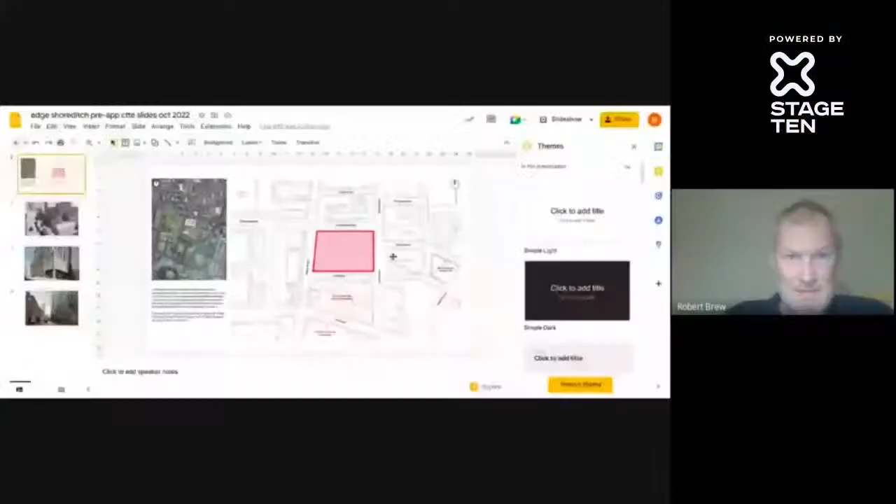Can I just check that I can present images in the normal way? Yeah. I'll try it anyway. Can everybody see that? I can't hear anybody. You can see it, Rob. Excellent, thank you. I'll continue then.

The site is in Shoreditch. It's a block bounded by Christopher Street, Wilson Street, Crown Place, and Earl Street, quite close to Finsbury Square, not very far at all away from Liverpool Street Station. The most significant heritage asset in the immediate vicinity is a terrace of Grade 2 listed Georgian houses on the north side of Christopher Street.

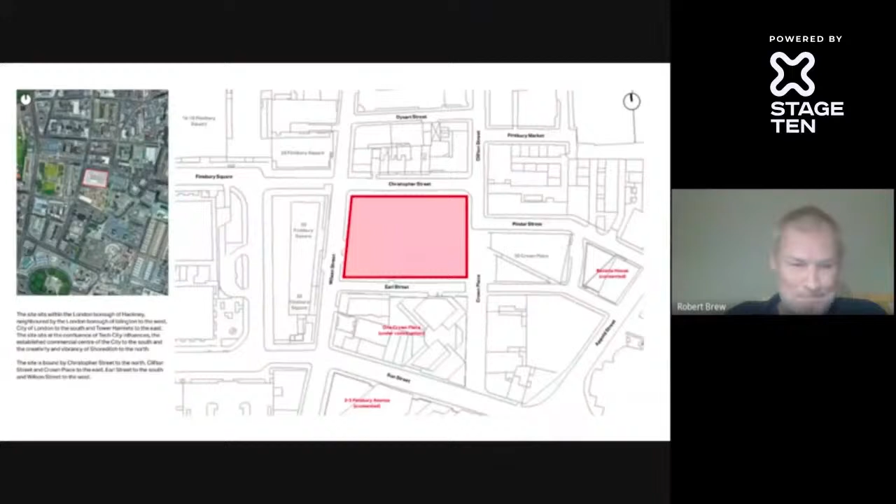Last year, in October, this office scheme, a 21-storey building with 3 basement levels, was approved, and it would provide about 65,000 square metres of office space, quite a large scheme. The current pre-application submission is for a slightly larger building, but with enhanced sustainability credentials, which is welcome, but of course there's some work to be done to ensure that those sustainability benefits are actually delivered.

The main issues of concern at this point relate to heritage impact, form and massing, sunlight and daylight impacts, and cycle parking provision. But also it's worth noting that the scheme has the potential to be an exemplar in sustainability terms. And really, at this point, I'm going to hand over to the developers to explain the scheme in more detail.

Thank you very much, Rob. We've got a group of people here. We've got Fiona and Bernard from Edge, David from Mitsui, Tom and Francesca from AHMM, and Hugh and Jake from DP9.

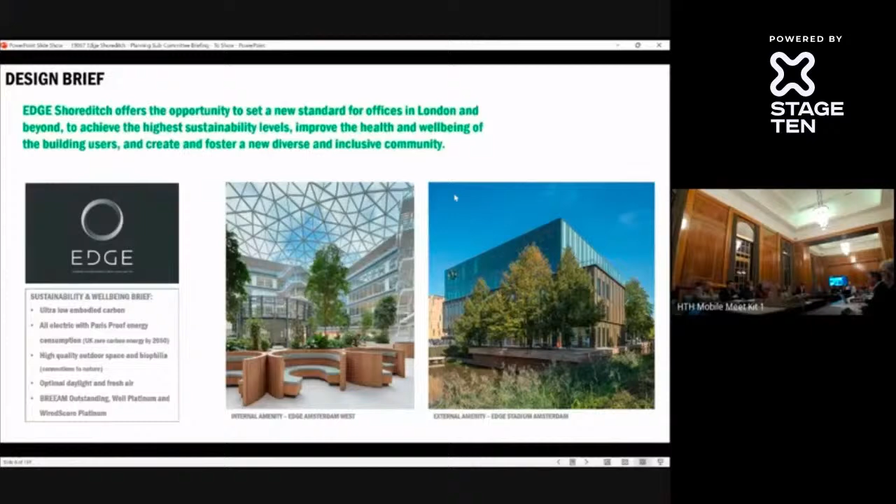Essentially an office-led scheme. There is an element of retail at the ground floor, but principally it's an office development.

As a firm, we've worked in Hackney for many years. We've been involved in the continual refurbishment of the Tea Building for over 20 years. We've most recently finished a scheme, Shoreditch Village, for Brockton. We are on site with the scheme at 225 City Road with Glamco, which is residential above office space. And we've received planning consent for Development House.

Now, all office-led schemes, all with different approaches. We like to think contextual responses to their specific location in Hackney.

We're also working with a very extensive and experienced design team. In particular, we have Atelier 10 as services engineers, AKT as structural engineers, both at the forefront of sustainability and driving down carbon within the schemes. And also notably MRG, the landscape architects, and you'll see some of the approach to outdoor spaces and planting that we're looking to deliver on the scheme.

You'll be familiar with the site, it's already been introduced. It's quite a transition site. To the south, on the right-hand side of this image, are a number of taller buildings, and in particular the whole Broadgate campus will soon be much, much larger than shown here. But to the north is the lower scale context of South Shoreditch. To the west, the bottom right of the image, is the setting of Finsbury Square, of which our building provides a backdrop.

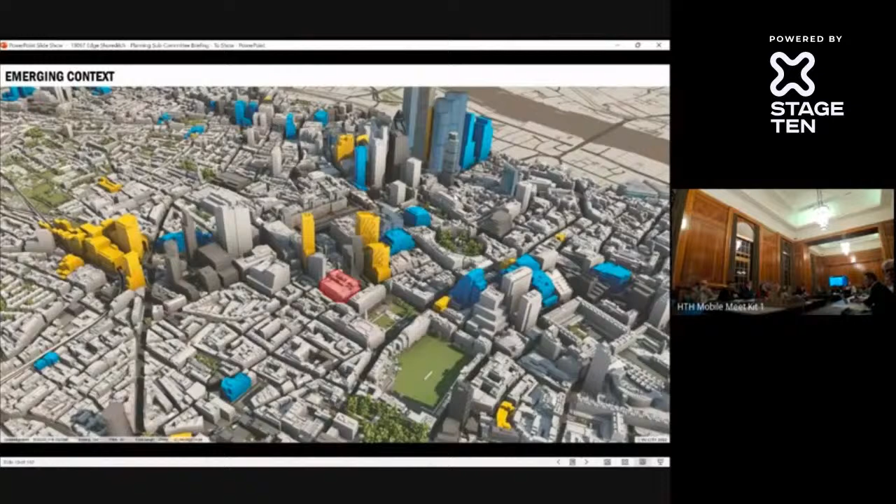As has already been mentioned, there is a consented scheme on the site. Just a couple of townscape images here, which show the character and massing that was consented - we might touch upon that a bit later. And then the aerial overview again, which has been presented.

I think a starting point for us was not about tearing this up and starting again. It was thinking, well, what were the key principles of this scheme that we would want to retain in a new development? So, the inclusion of office space, affordable office space, is very important, and where that's located - having multiple entrances to the building, active frontages and retail at ground floors, considering how the massing steps as it rises through the site. In particular, how it's lower in the foreground of this image in the northwest corner, rising to a taller element in the southeast corner. Considering key townscape views and context, the LVMF restrictions on the site, and also thinking about areas such as servicing and outdoor terraces.

So I'm just going to take you through the 5 key touchstones that we've outlined for this project, and it will touch upon all the elements of the scheme to date.

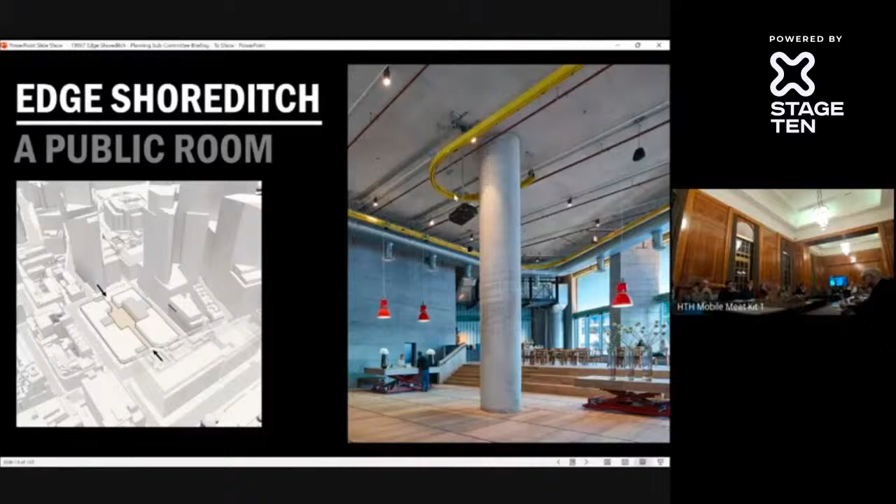The first key principle for us was to create what we call a public room, or a central street running right through the heart of the site. This is a publicly accessible street which members of the public could walk through during the day - something we always feel is very important in our commercial schemes, about being open to the public, allowing them to enter and access and feel welcomed. We think these office buildings today shouldn't feel closed off and intimidating to enter, so driving a route through the middle has been a fundamental principle to us.

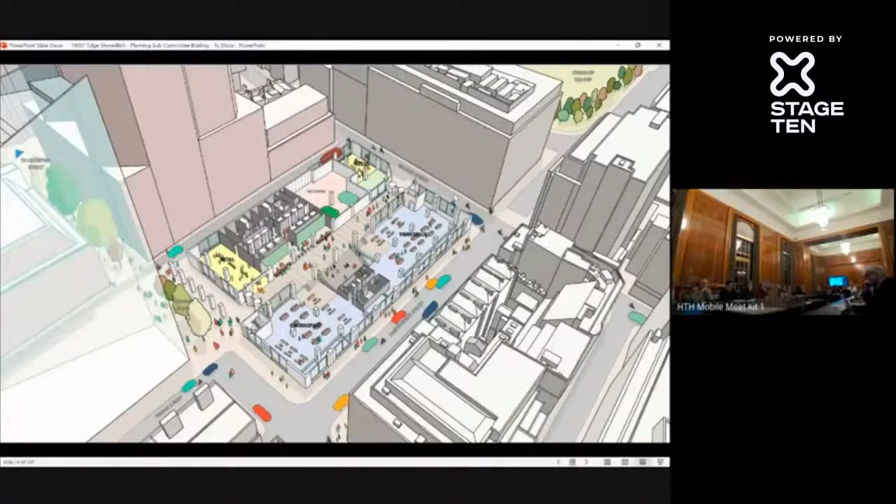The sketch on the screen here reflects that: connecting a street through the middle from Wilson Street to the west, at the top of the image, and Crown Place to the east on the left-hand side. That will allow people crossing all the way through. The important thing here isn't just to create a shortcut, but to allow people to wander through and feel welcome. This street will be activated by elements of retail, planting, artwork, and workspace.

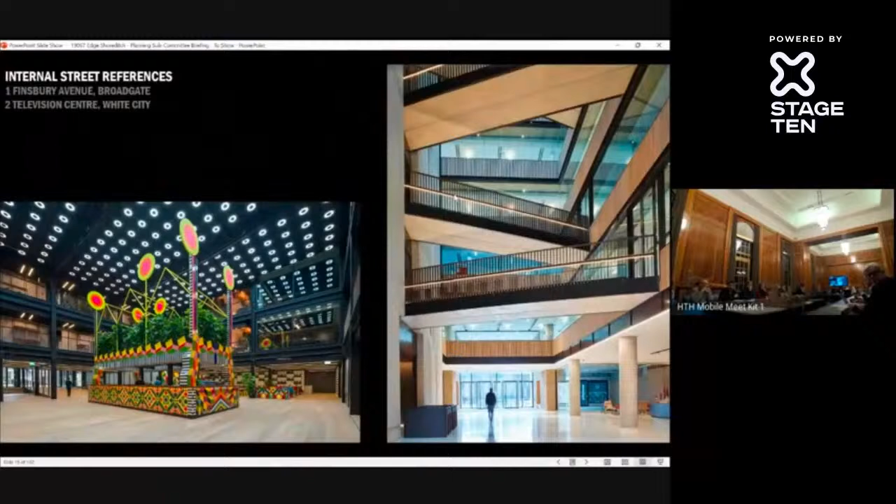We've adopted that approach in a number of schemes. On the left-hand side, our 1 Finsbury Avenue, just to the south of this site, is our refurbishment of the Arup Associates building, where we've got temporary cafe spaces and exhibitions that get held, so people can walk in and out and through. Television Centre on the right, which we completed with Mitsui, again connects two parts of the previous television studios through an office development.

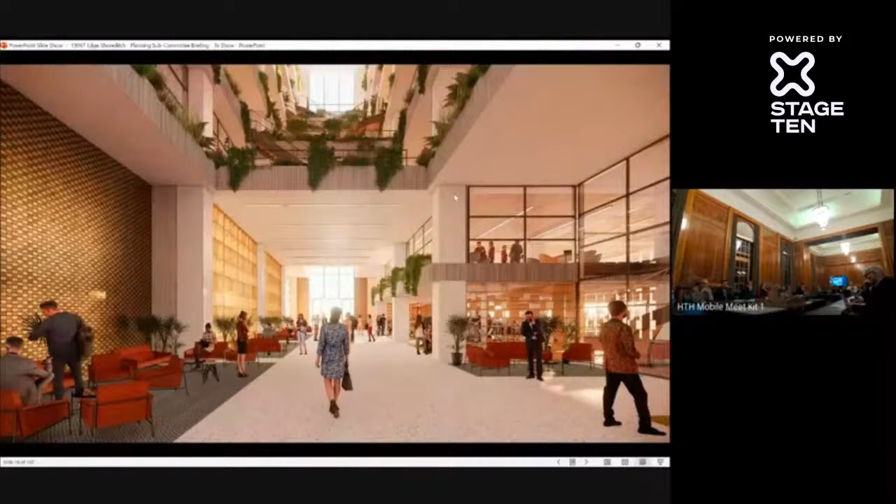So, an image of our scheme. I'll come back to some of the characteristics later, but this image reflects that route through the middle, and you can see on the right-hand side the workspace. In this instance, it'll be affordable workspace. There'll be breakout spaces, meeting spaces, touchdown areas, with a good clear, effectively two-story height, six meters clear as you walk through, and visibility of the atrium spaces above, which I will also introduce shortly.

To the south of the street, we have the primary office core. To the left of that, the loading bay, which is much smaller than the consented scheme. The intention is to provide consolidated servicing, meaning all deliveries are collected off-site, packaged up and brought together, so there are fewer deliveries to site each day, which helps reduce traffic. It also means you don't need as many vans or loading bays. It's a really, really good, sustainable approach - I think most office schemes will ultimately be delivering this in the future.

And then retail on the southeast and southwestern corners. The southwestern corner connects to our cycle store entrance, located on Wilson Street, adjacent to the cycle highway running through there, with the intention being that our retail and cycle store entrance could ultimately become one space - a kind of bike cafe workshop area, quite lively, really promoting cycle usage.

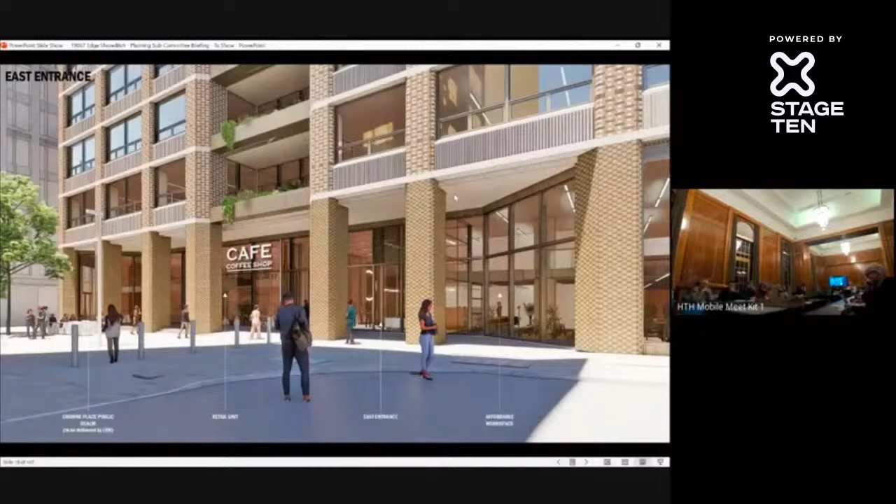To the east, we set back the building on Crown Place, creating a colonnade that runs along the length of Crown Place, which provides an entrance and a clear front door to the scheme. There's a retail unit there with covered outdoor seating space, balconies above the entrance, and the affordable workspace - those lower levels are very, very visible there.

The second touchstone for us is about creating a building that's very much of its place, that responds to the character of Hackney. It is a large office building, and we are looking to deliver a large amount of floor space, but we're very keen that it isn't something alien to the borough and does reflect its context.

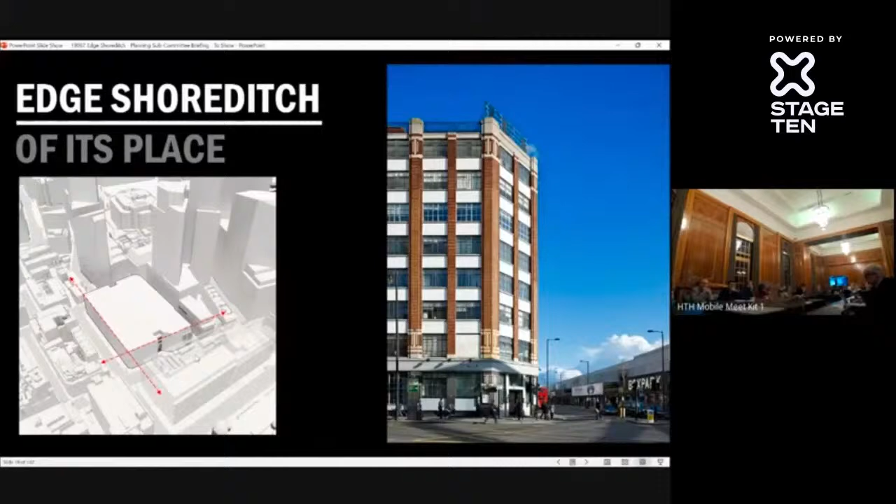So the first move here is about setting a sensible datum, or shoulder height, as shown in the diagram on the left-hand side. As with the consented scheme, there's a 5-story shoulder that runs around the west and north of the site, before the massing then steps up above it.

We've looked very carefully, and continue to look very carefully, at the character of the context and Shoreditch in general, both the immediate context and the slightly more distant context. We really love the detailing, the grain, the colours and the brickwork and tones visible in Hackney. We want to bring that through into our scheme, and you can see a lot of brickwork here, with elements of stone and concrete interspersed within it as well.

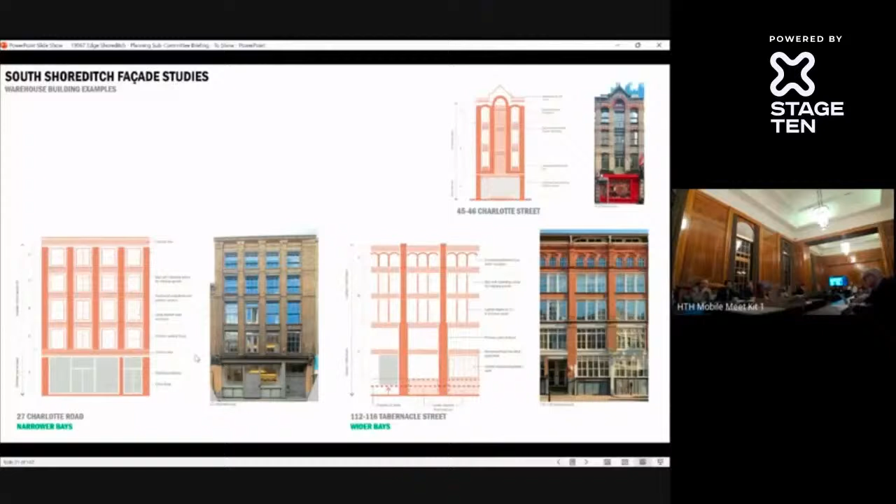We've also looked very carefully at proportions and bay widths, and how some of the more warehouse facades combine these elements. So we've got slightly tighter grain and tighter bays, and wider grain and wider bays, and we've looked to bring that through into our scheme.

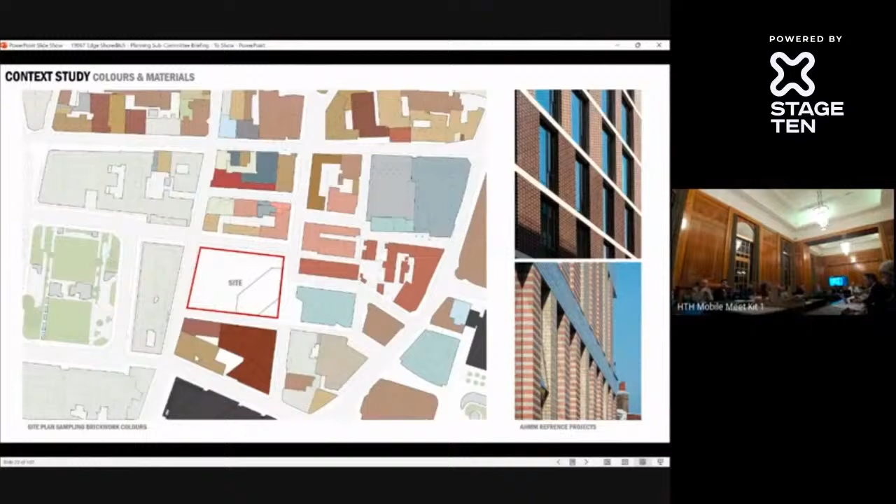The key point here is also to respond to daylight and solar heat gains, and we're very keen to maximise daylight to the office spaces. We've got large office floor plates, and we want to maximise daylight for health and well-being. So it's about creating openness to the facade while also respecting the character and the context.

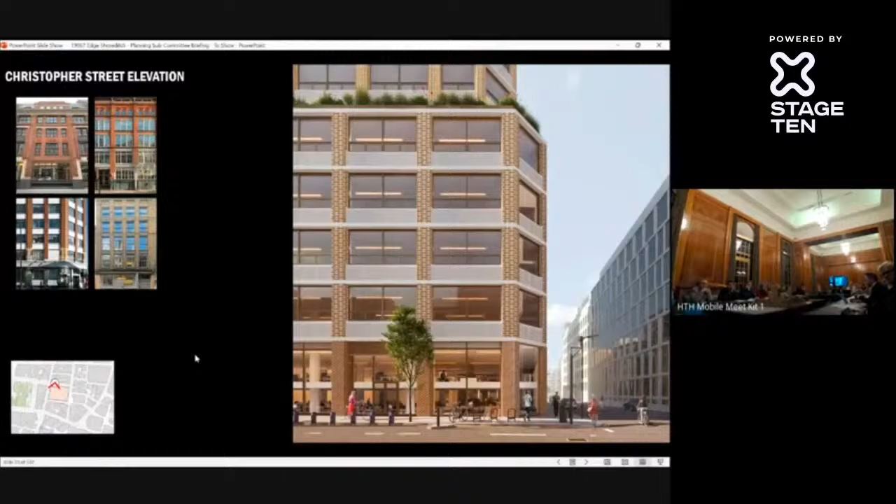We're looking to integrate brickwork, these vertical brick piers, in reference to the warehouse facades you might see nearby, with elements of concrete and reconstituted stone running through as well. Importantly, we're also providing solid panels and upstands beneath the windows, so that clutter from desks and things like that isn't visible on display.

In response to that, it helps reduce the impact. It also helps signpost and identify entrances, and we think that's a nice detail to bring into the corners of the building.

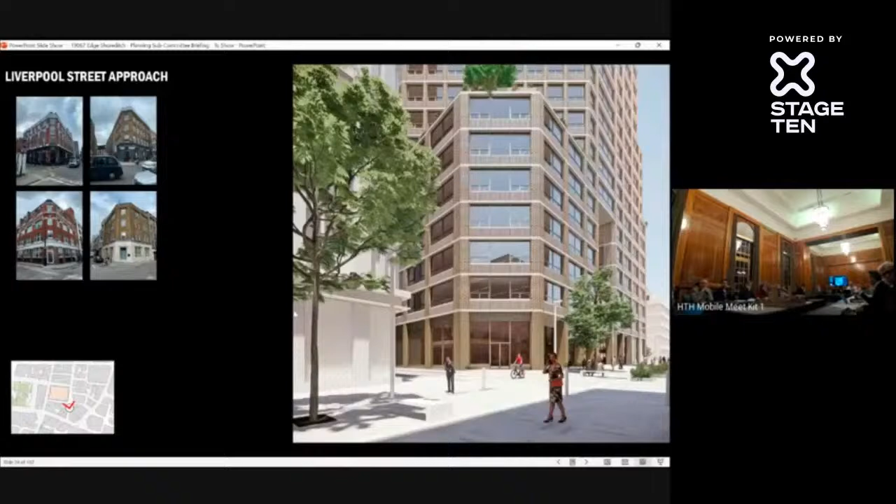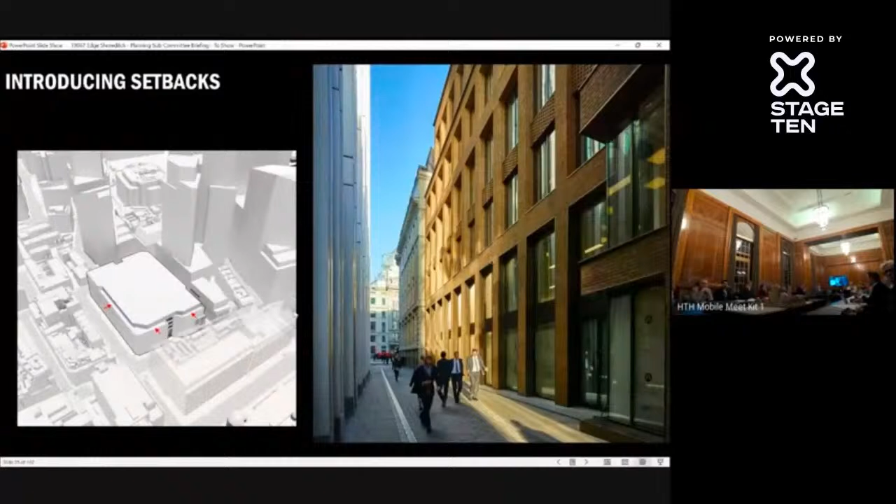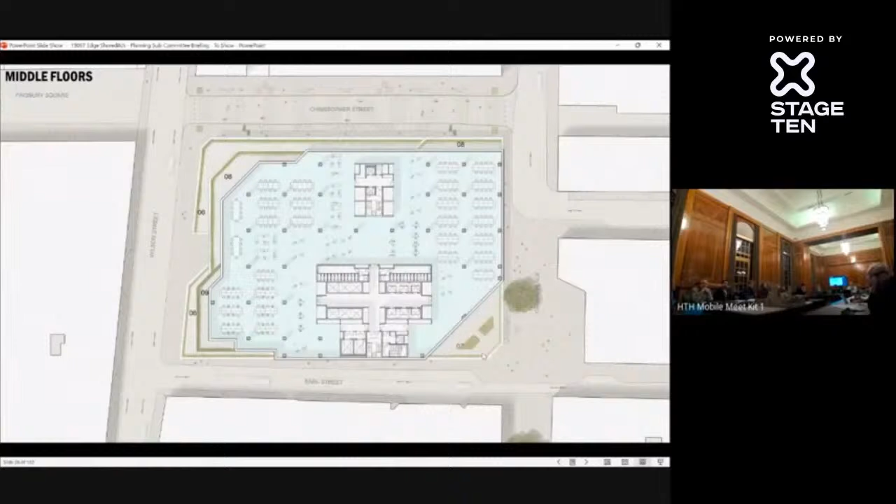You can see we set the building back on Christopher Street to the north, on Wilson Street to the west, and there's also a large cut on the southeastern corner, as the consented scheme did, to respect daylighting to the residential scheme to the south. We have the core located on the south of the floor plate, which helps mitigate or minimise overlooking to the residential tower, with a smaller core to the north for circulation.

Just to touch upon the process we've been going through with the officers, we have been actively engaging with them and listening to comments. This is just a selection of imagery.

On the left shows the consented scheme as visible on Christopher Street. The middle image shows how we started to think about setting back our massing. What's really important for us is that rather than having one setback, we introduce a number of tiers in the building.

You'll see in the notes that the first setback we're creating is slightly less than the consented scheme, but then we set back again above that. Through further discussions with the officers, we've pushed that back even more, as shown on the right-hand side.

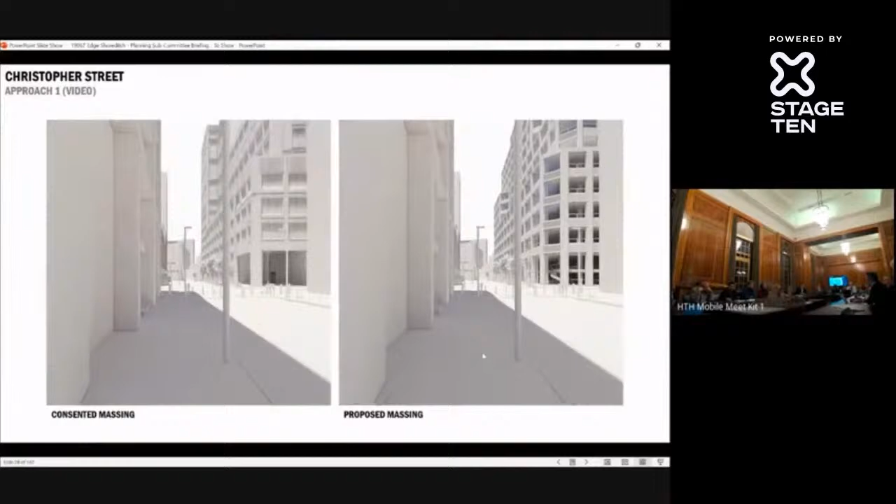We've also been considering the kinetic view, as you move down the street. On the left is the consented scheme - I think the tall tower element at the end plays a large part in how you perceive the massing. On the right, you can see the number of tiers we've introduced, which we think help reduce the impact on this street.

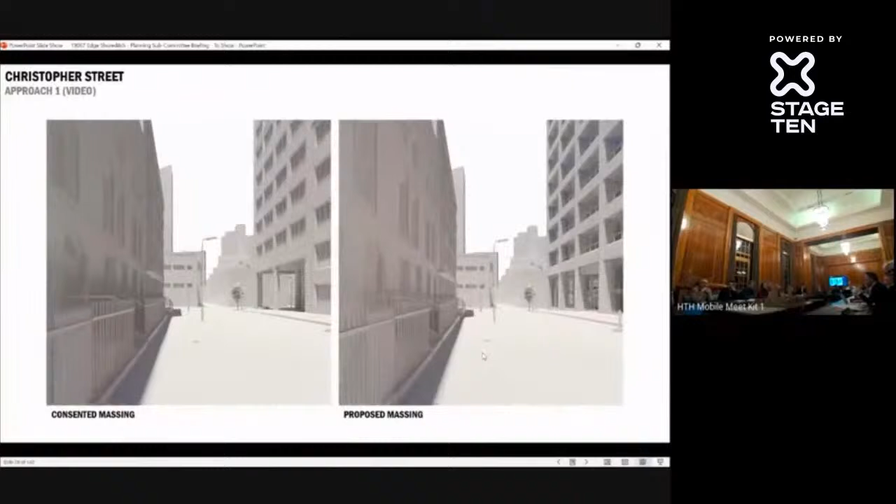So we've been using this technology to consider the massing from these key approach views, and then a couple of static views, where of course when you stand on different streets and look different ways, you're always going to get different views of the building compared to the consented scheme.

In this particular instance, we're just highlighting the increased visibility of the sky on Christopher Street. Also on Wilson Street, where our massing starts to step back, there's again less of a sheer facade there - the terracing increases visibility of the sky and introduces more outdoor space.

Moving on to the third element of the scheme, the idea of greening the city and terracing on the upper floors of the building, a very key part for us. One of the main briefing points the client set us was making sure every floor had access to outdoor space, every tenant. That was a key driver for us and set a very clear brief compared to the scheme that got consent. How do we provide outdoor space to every floor, every single tenant? That drove our response.

On the left you can see the diagram showing how we look to break down the massing and interlock a series of terraces that step up from the northwest to the southeast, creating terraces that allow greenery to be provided. On the right is an image of a scheme in Clerkenwell we've delivered, where we use planting on the balustrade edges to bring visible greenery to the building.

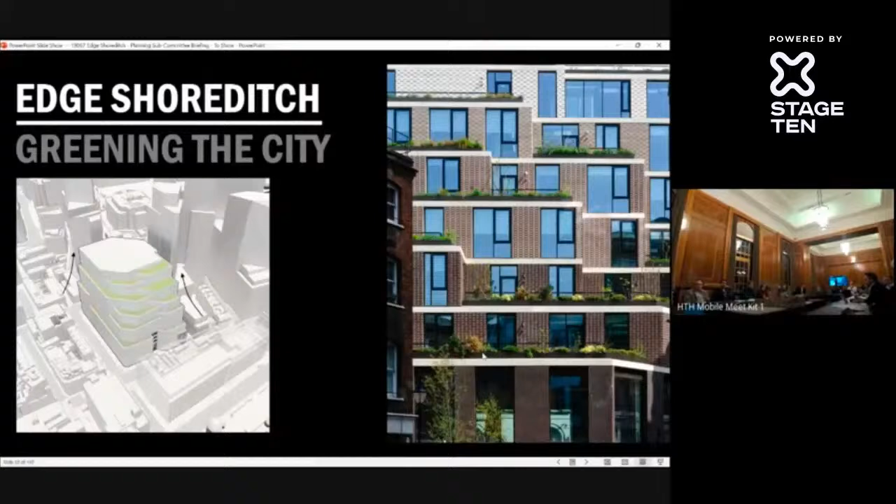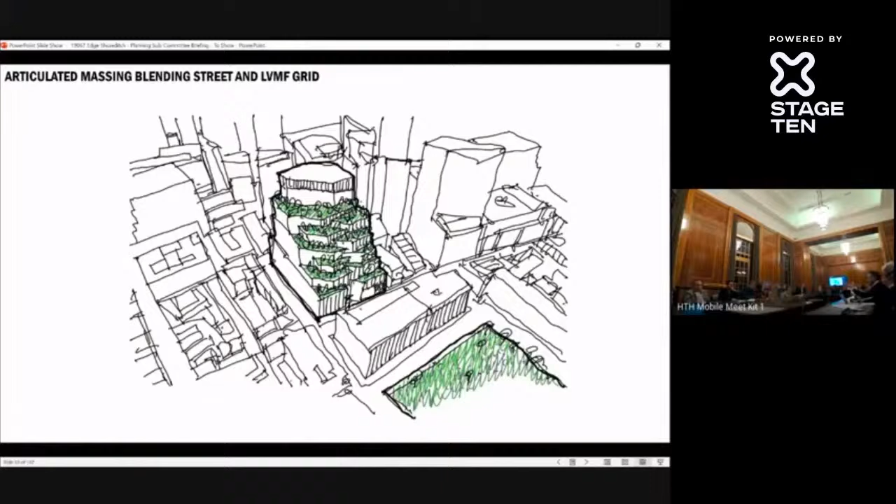This loose concept sketch shows how that makes its way up to the very top of the building. The key design intent was to mix the orthogonal city grid at the lower floors with the diagonal that creates the cuts at the top on the tower element, as seen in the consented scheme, then follow that angle all the way down to create this geometry.

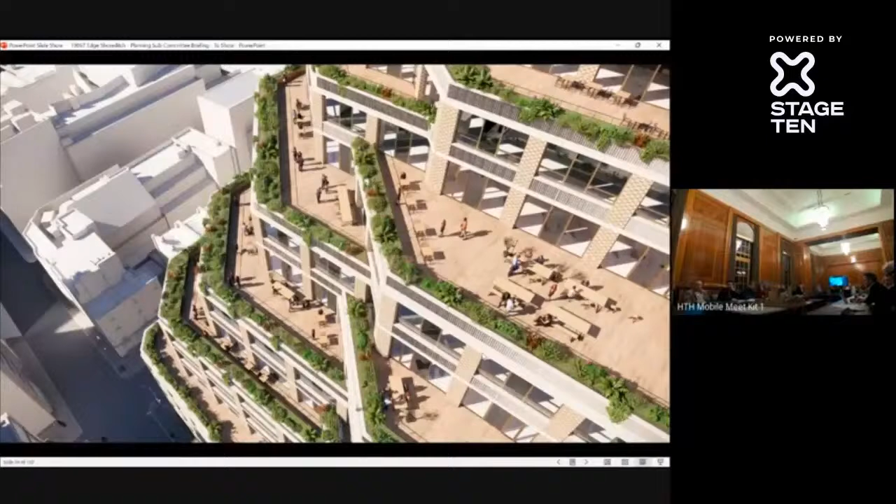We've been working with MRG landscape architects and had good discussion with the officers recently, which was well received, about creating a variety of spaces across all the floors. This is a gradient of outdoor spaces responding to different microclimates: providing planting, seating and furniture on floors with higher wind requirements, or more shaded requirements, designing each terrace individually. Also thinking about biodiversity, habitats, encouraging wildlife into the city, and wildlife corridors through developments.

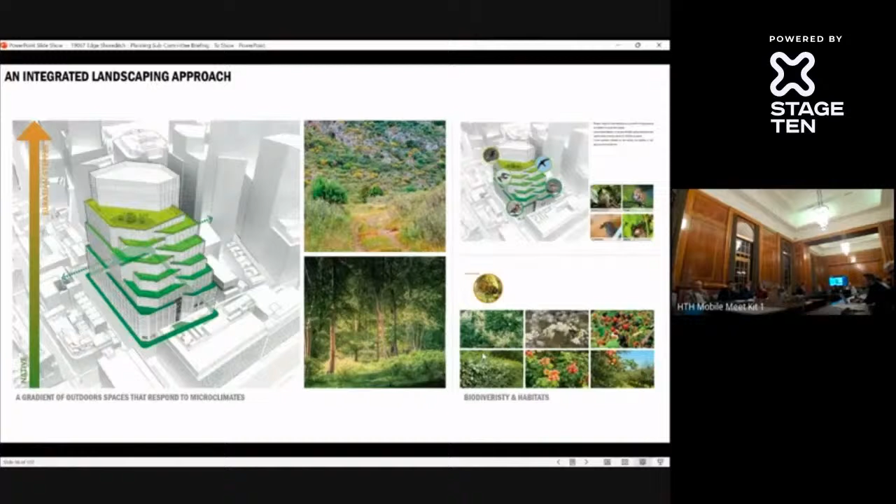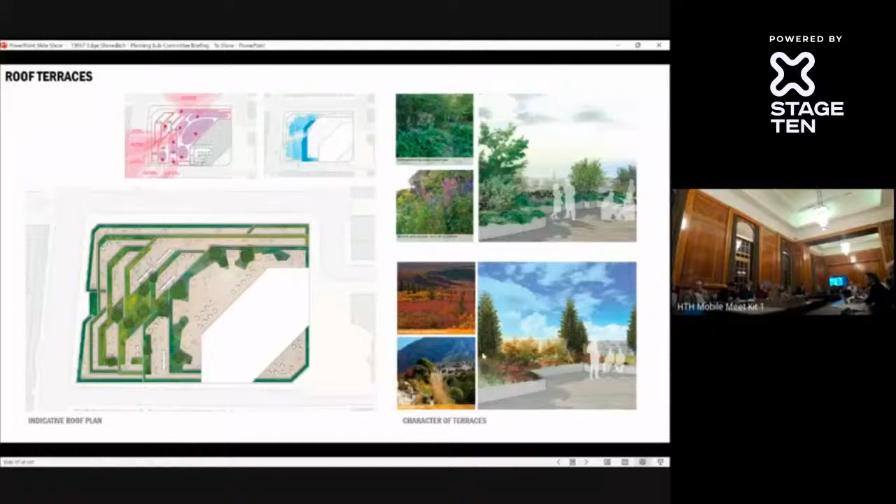Some indicative drawings show how we might deliver landscaping on these terraces. It's not entirely green space - we're providing hard surfaces too for outdoor seating and meetings. We're considering views from all terraces to the local context, the microclimates, and on the right you can see the variety of colours and characters. This will be experienced by tenants but also visible in the context - the planting strategies and colours will be seen from a distance.

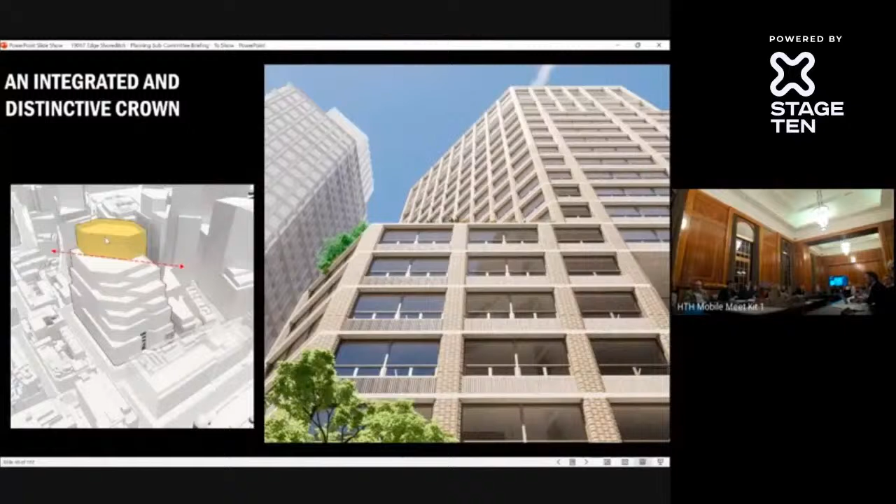Lastly, on the massing, it's about how we create and integrate the top of the building, where we rise to the tower element, the tallest part of the site. For us it's about interlocking this with the terraces and massing below, so it doesn't feel like a separate element, which might be how we felt about the previous scheme.

You can see here the size of the floor plate up there. It's also about creating usable space - we don't want such a small, tall element that the floor space isn't workable and won't attract tenants. We want to create good usable space up here.

This view from Clifton Street looking south shows how the tallest element of the building relates to the lower floors, and you can see the four tiers of the massing stepping up, with the greenery wrapping around.

But also how the building speaks to its context. You can see the buff and brown colours of the brickwork in the foreground, and we're looking at changing the gradients, tones and colours as the building steps up to lighten the top.

We're also aware of some of the longer distance views from the west, in particular Finsbury Square. The context there is very different, and we feel our building is still going to be different - it has different language, different materiality - but we have been considerate, and we think it's important to respond to this in some way.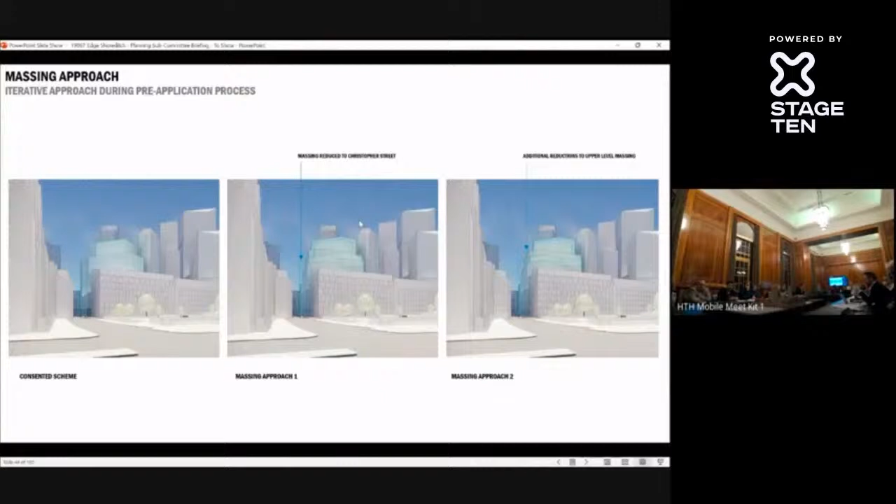Looking carefully at the size of the windows here, it's a much finer grain, more vertical in proportion on Finsbury Square. We've been looking carefully at the massing, so the top of our building appears slightly wider, but as we've gone through the design process with the case officers, we're now very close to the outline of the consented scheme, while creating an approach to massing that relates to the geometry of the spaces below.

Just a couple of before and afters here. The consented scheme is a bit more volumetric, with cut elevations and highly glazed elevations intended to read slightly differently to the foreground. What we're looking at doing is continuing the language up, with more verticality and smaller proportion of windows in reference partially to the foreground, but also the interlocking of the terraces and the greenery becomes very visible - you'll see these gardens stepping up beyond Finsbury Square.

And then also looking from the south, this is our building here. You can start to see the proportions of our tallest element speak to the width of the Crown Place Tower from this angle. So, last two topics, not many slides to go.

Internally, it's about creating a real best-in-class building, the best office space we can possibly provide, and that includes the amenity offer within the space.

We recognise that these floor plates are large, and some people often have concerns about daylight levels within these spaces. So our first move on this one is that through the lower seven floors of the building, we've carefully considered how we can bring light, activity and amenity space to these floors.

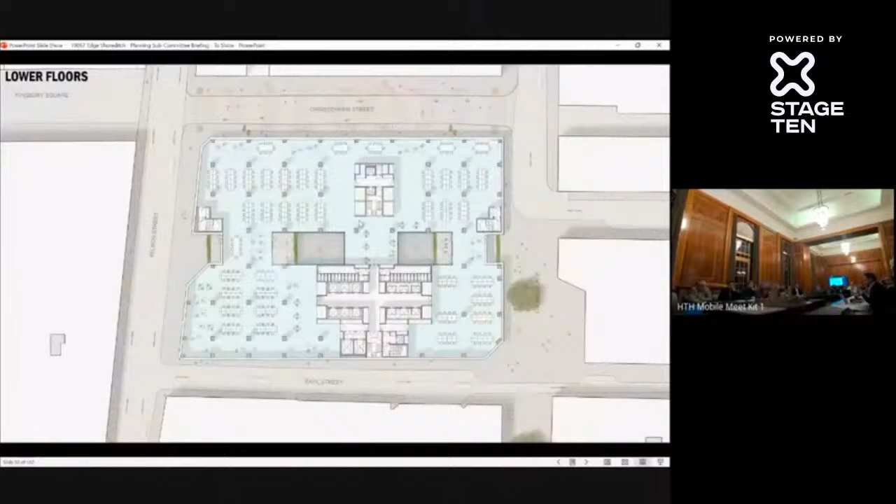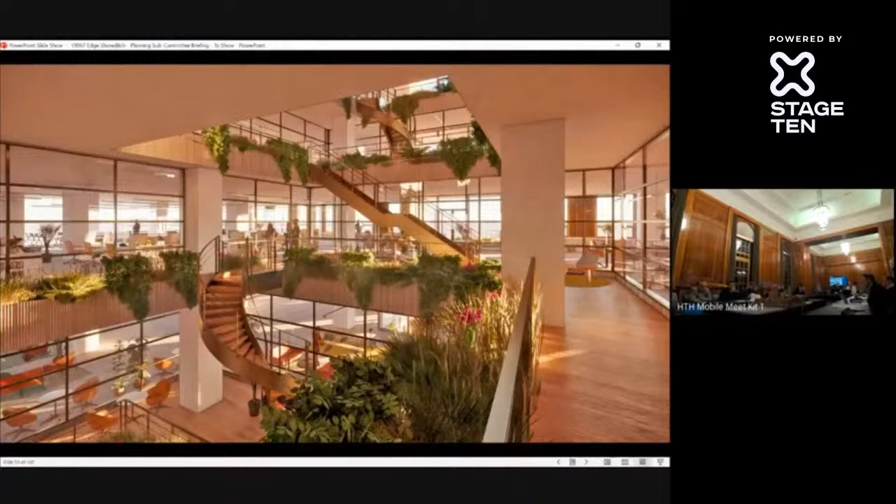This drawing shows a typical floor where we have the two atria and the core on the south. The amenity space is created on a typical floor - these are breakout areas for the office users to step out, meet and greet, with opportunities for the spaces to be interconnected with staircases. We're looking very carefully at what plants you can grow in these spaces as well.

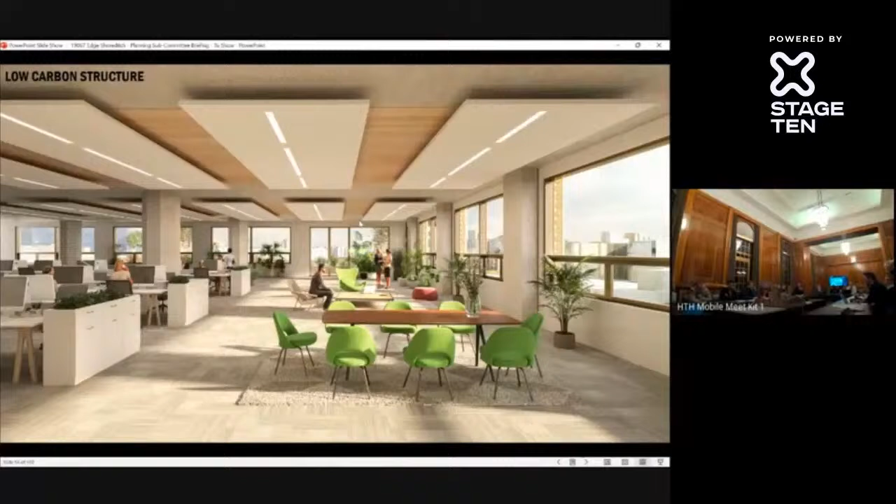And then lastly, the office spaces themselves - making sure we create good levels of daylight. We've got large floor to ceilings here, just over four meters floor to floor, 3.1 clear to the underside of the panels, 3.2, 3.3 above that. It exceeds any of the other office buildings we're currently doing at the moment, and I think that's really important in terms of delivering the high quality spaces that our client is looking for.

And that leads on to the final topic, which is about building for the future. We talked a bit about sustainability at the beginning - we're looking to respond to multiple requirements, guidance documents, policies and emerging government issues. We are having to hit, and we are looking to achieve, the highest possible accreditation with BREEAM, WELL and NABERS.

There's energy targets that have been set within Edge's own net zero carbon framework, very low energy performance targets as well. So you have to think very carefully about how we heat the space, light the space, how that's controlled, and that's where the technology comes into it. Also thinking about water and drainage and reducing water usage through the scheme is a very key element there.

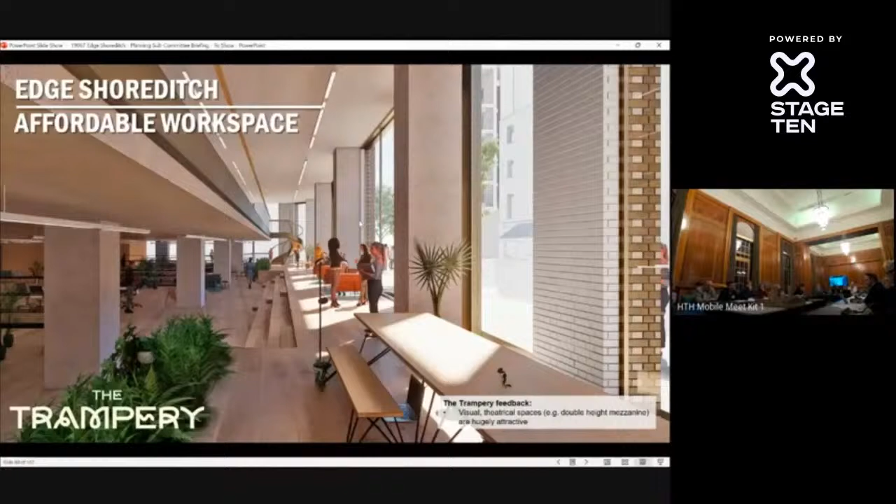They also think that these visual, theatrical spaces that we're creating between ground and first floor, and how it connects to the lower ground as well, are hugely attractive. So these double height spaces here overlooking, and this is on Christopher Street.

And so they've also given us a brief for how we divide up the spaces, how we can look to provide suitable space for a mix of users, creating members' lounges and arrival spaces on the frontage of the building, breakout spaces and meeting rooms within the spaces, and then how we can carve up one large space into multiple co-working, open plan or studio spaces.

And I think the last point from them is about their interest in internal mentoring schemes, so the ability for commercial space users to mentor and engage with affordable workspace users. And I think that's why we've been very keen to bring the affordable workspace into the heart of the scheme.

It has frontages on Christopher Street, but it now also has access to and frontages on the central street, which is the ability for commercial users on the upper floors to meet with the affordable workspace users, and also provide spaces for the different companies within there to meet themselves.

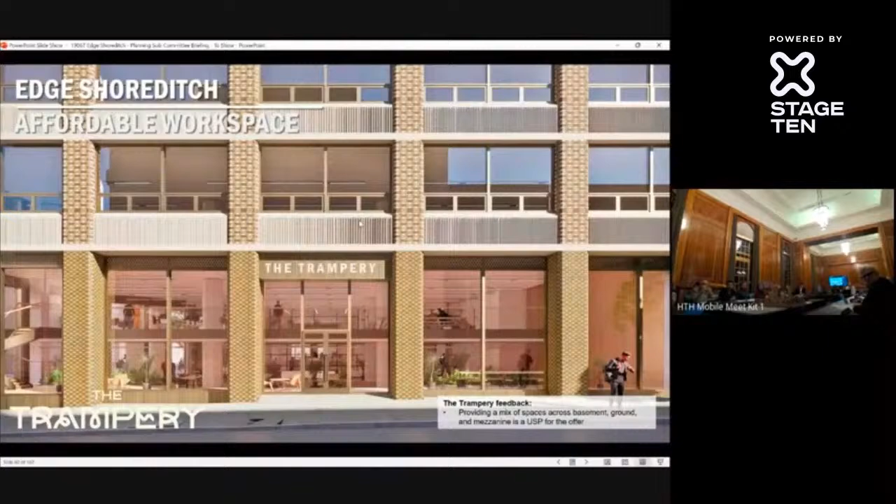And this then shows the two lower floors there as visible from Christopher Street. Very, very lively, large glazed elements, and you can see the life and character within there.

So that's the design. One final slide on consultation, and then it'd be good to get your thoughts. So we've been going through the pre-application process. We've had 5 design-focused pre-application meetings with the team. We've met with the Affordable Workspace team twice, transport team twice, and the public realm officers once, and we're looking to meet them again so that we can coordinate through the submission process how we might get the public realm interfaces around our building.

We've also engaged with stakeholders through June, July and August. We distributed flyers to a number of addresses in the area. We held a public consultation event, social media campaigns, on-street engagement as well, and have collated responses where we can. It's fair to say we didn't have many attendees or responses, unfortunately, but we've had some, and we've considered it all, and we've also actively engaged with One Crown Place to the south of our scheme.

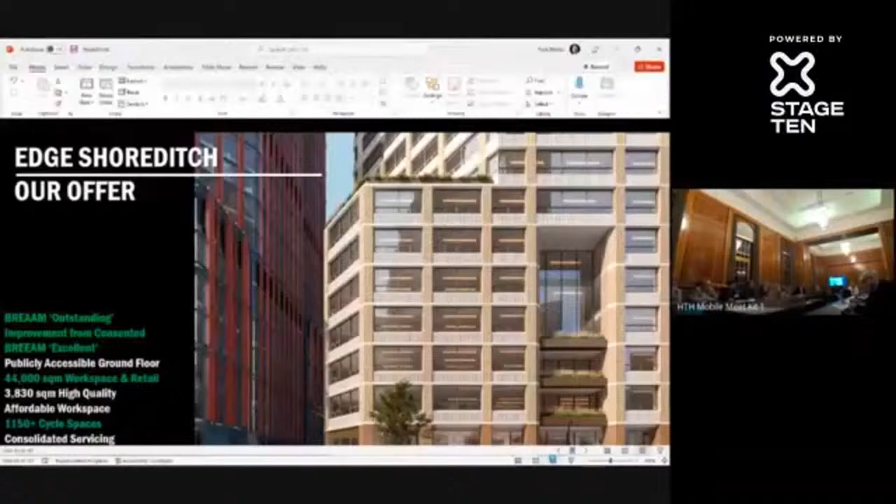Yeah, I can bring some slides up if you want to start here, and then I'll get some slides. I've been discussing with officers throughout the process. I think the previous scheme did retain a facade. When we interrogated that, and I think Tom will bring up some slides, it provided very compromised floor space because of the nature of modern buildings and the floor to ceiling heights versus obviously the Victorian facade.

Now that is something we still need to agree with officers. And Tom, I don't know if you want to just take us through the assessment we did. So Hugh's kind of summarised it there. Am I coming through okay?

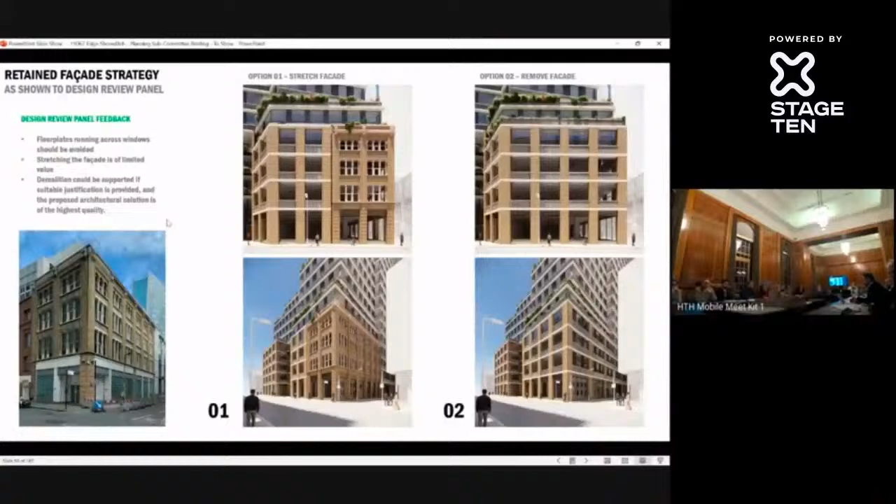We've had lots of engagement with Hackney on it. There are differing opinions. I think the design review panel have suggested that they think demolition could be justified if suitable justification is provided and the proposed architectural solution is of the highest quality. We feel that we are providing a high quality building here. We are tying into the context heights, and this image that I showed earlier is what would be replaced on the site there.

So I had a wander around today, and Crown Place, as you'll know, has some great heritage assets around there - very effectively, actually, not just the chapel and the pub, but also facing on the side streets, as I'm sure you know. I suppose I find it slightly ironic that the presentation has leaned quite heavily on the language of Shoreditch, which is a very special place for these buildings, and we do our best to try and maintain the heritage and history alongside the significant developments going on there. So it would feel like a real shame that we lost that building next door, just on the basis that we're keeping some of the language in the new building.

To what extent do you think there are options to make it work that you might be able to look into? Someone else?

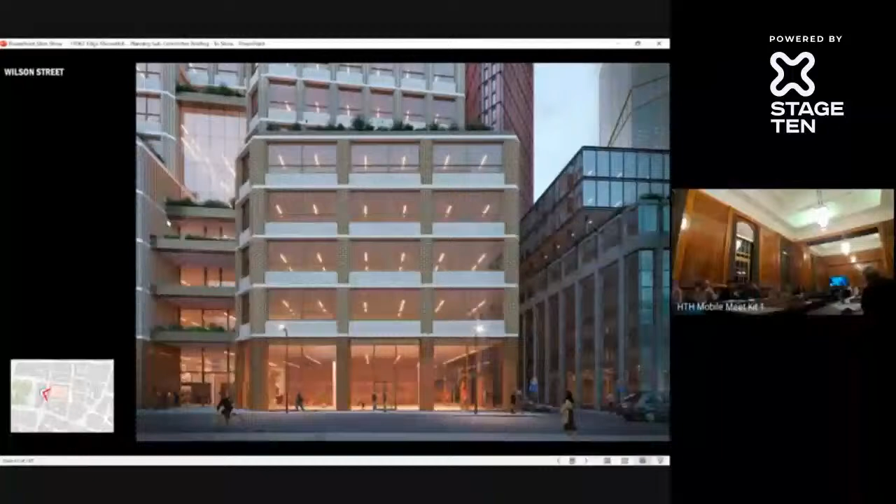I think it'd be wrong of us to say that it couldn't be retained. But it does need to compromise floor space and result in a loss of area. That's some of the advice we've received from the agents, which obviously leads to challenging, less attractive layouts in that space, and that's what led us to the decision.

The other thing I didn't pick up on was carbon and sustainability. When we've been asked to amend the scheme, normally the first question is, can we amend it? What does it look like in the townscape? It's confusing, interesting, but we take that feedback back to Edge - what does that mean for structure, for embodied carbon, for steel? We've done an exercise for this, and because of the sheer amount of structure required to maintain the facade in its position, it's actually a more carbon intensive approach.

Again, it is a delicate balancing act, and we are still coming to that with officers, and we're looking for some guidance on that. So there is a solution - it can be retained, we can approach it in this instance.

I would just add that it isn't just about sustainability. That is one side of it, but there is a real design intent behind this as well. We want to create the best possible office space. We feel that gets slightly compromised by doing this, but we recognize that leads to the removal of this facade. I suppose best practice is easy when you're starting from a blank piece of paper, but it's part of the whole considerations in the area.

Talking about the Trampery and the base of the building, I think it's good to mention that in relation to the street. One of the challenges that we normally face is that it's nice to make a public building, but normally it's quite hard to then get the public in. People, even if they are welcome, they probably don't feel welcome. What we like about the Trampery and the affordable workspace offer, and that's why you can see it faces onto the street, there's this permeable layer, breakout areas, is that they tend to bring in a range of smaller companies, so smaller startups, slightly growing companies. By doing that, you create an ecosystem.

And this idea of an ecosystem really works. It's exactly what we have in Amsterdam. I think there's close to 200 businesses in our building. It's a lot smaller than this building. It ranges really small ones, slightly bigger ones, slightly bigger ones. And it's an idea of growth. So smaller companies can start at the Trampery discounted rate. If they grow, we have loads of different sizes of floor plates, ideally they could move up into the building. It's these small companies that have a lot of people coming and going, so they create the life as well, and they make the whole base of the building there for more public, draw people in, create life there. In return, the big occupiers want to get people into London. They like London because of the hustle and bustle of London. You can bring that into that ecosystem. It's a win-win situation for both. So that's how it works.

I think if I could just add to that as well, I think the way Trampery operate is that they don't tend to design a space that's just for one type of occupant, because affordable workspace by its nature is these smaller startup firms. They don't tend to go on a waiting list for years to join, they just need space and they need it quickly. So people like the Trampery look to provide that space and keep their spaces flexible so they can cater for very different companies. They have a lot of companies in Hackney, in kind of creative industries or small tech firms. In particular here, just north of Broadgate in the city, you can see where the kind of media tech offer will be quite important, and it's a great opportunity for these smaller startups to locate themselves.

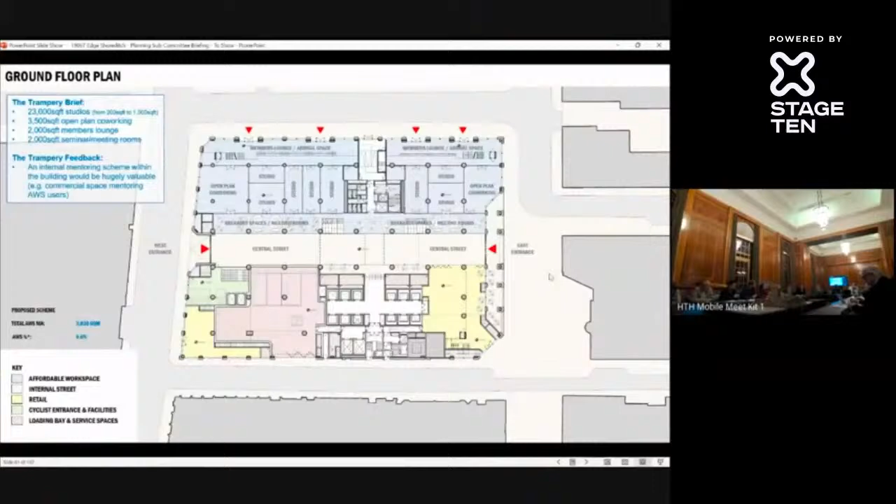It is good to mention that in terms of the overall proposal, the previous proposal has 2/3 of the affordable workspace underground. We think by definition people shouldn't be working underground, so we have 2/3 of the space above ground. People like the Trampery want some stuff like a basement for event spaces, mostly because if you're in the basement you have lower rent, so they like that space for temporary things, events, screening rooms. But in our case, it's less than 1/3 of the space rather than the majority. So everybody sitting behind the desk should be above ground, because we think it's not the right thing to do, to put people, even if they pay less rent, in a basement two layers below ground.

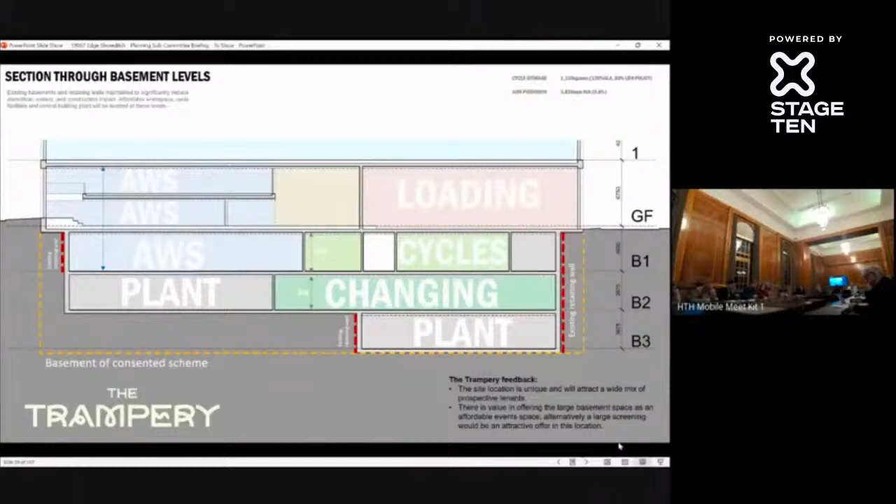My question was about the frontage to Christopher Street, opposite those terraces. The presentation talks about how you've increased setbacks further up the building to allow more access to daylight, but at the same time the first setback is reduced by a metre, from 4.5 to 3.5. I was wondering if you could talk about what impact that will have on that row of terraces. It's worth pointing out that the Georgian terraces are offices, aren't they? They're not residential - the residential is the other side.

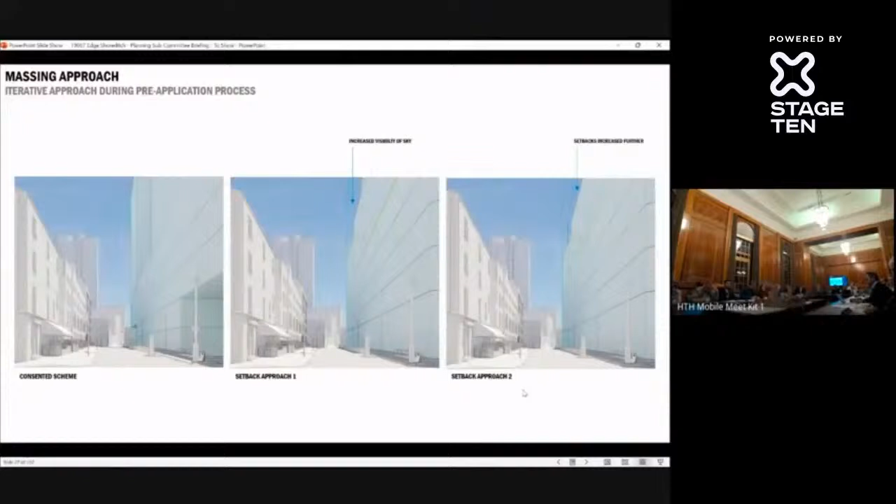Yeah, I've got the slide, so I can flick between these as necessary. I think perhaps if I just flick back to show the smaller diagrams that's visible. Ultimately, we don't think that having an additional metre of setback is more beneficial than creating a series of steps in this facade. We think there's a better balance to be had by creating 4 tiers on the northern elevation, and you can see on the right hand side here how the visibility is increased. This is where we started to create these kinetic views, because you can talk about numbers and you can stand in one location.

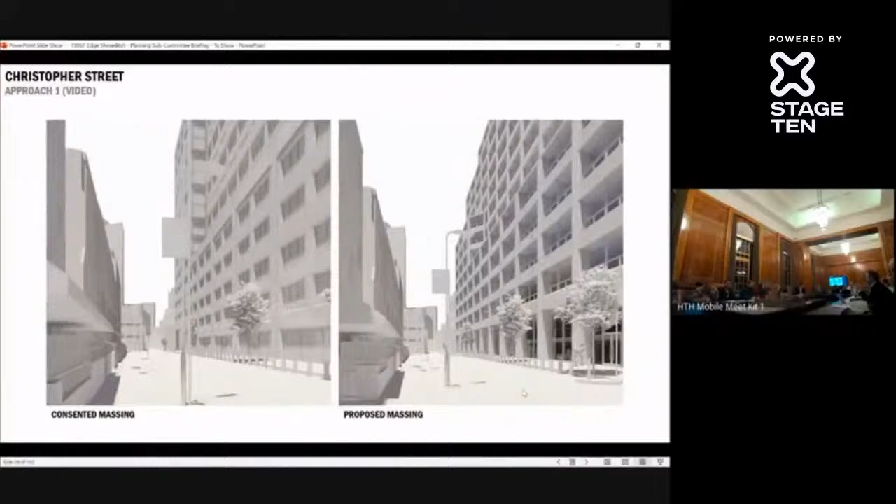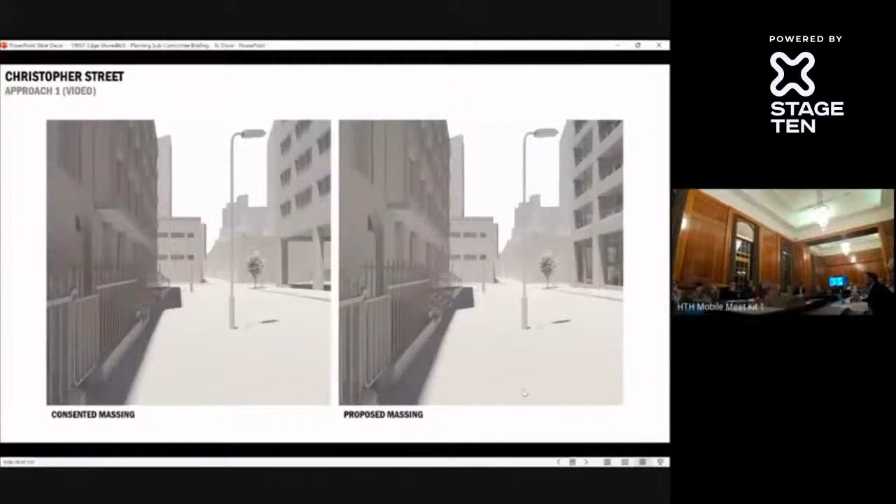I think one metre we don't feel is noticeable. We don't think it changes the feeling you get on the street, but we do think that reducing the tower element, as you see on the left at the end, will have a major benefit. We think having multiple tiers will have more of a benefit. So we just feel that on balance, it's a better proposition and will enhance the quality on that street compared to the consented scheme.

Do you have a picture of how it looks now, for comparison? No, sorry, I don't have that. There's the site photo.

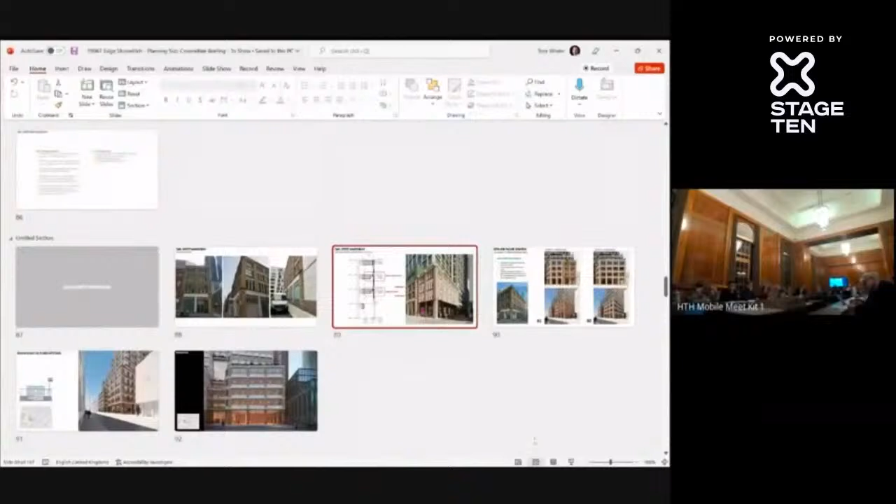Just a last question on the facade that's taken down. Could you go back to the picture where you were showing it as it stands now, but with the facade, with the new building behind? I understand that if I was not on the ground, it would look much more consistent to have this lovely new building where it's a complete building. But if I'm walking along the street, it's going to look nicer to me to see the nice old buildings. I'm not noticing the new buildings. I can't, from street level - I'm a lot shorter than that pillar - I'm not going to be able to see the building above. I'm just going to see the nice Victorian thing. Is that, am I misunderstanding?

So it's right that if I'm just walking along the street, I'm only going to see that Victorian building on the corner and the bit next to it. I'm not actually going to see the bit behind it. So it will make a big difference to what I see as a person walking along the street, somebody who frequently cycles past this but doesn't work there.

It is definitely correct that architects tend to look a bit too much at the bird's eye view, and probably not enough at the street level view. I think that's something we have taken into consideration, but we'll continue to look at that as part of the process, because it is a 100% valid point of view.

So just to check, you mentioned that if you did it like this, it makes a difference to what you can see through and underneath the pillars. So I would see the new building through that, between the pillars, is that right? Can you explain a little bit about why, if you have to build it like this.

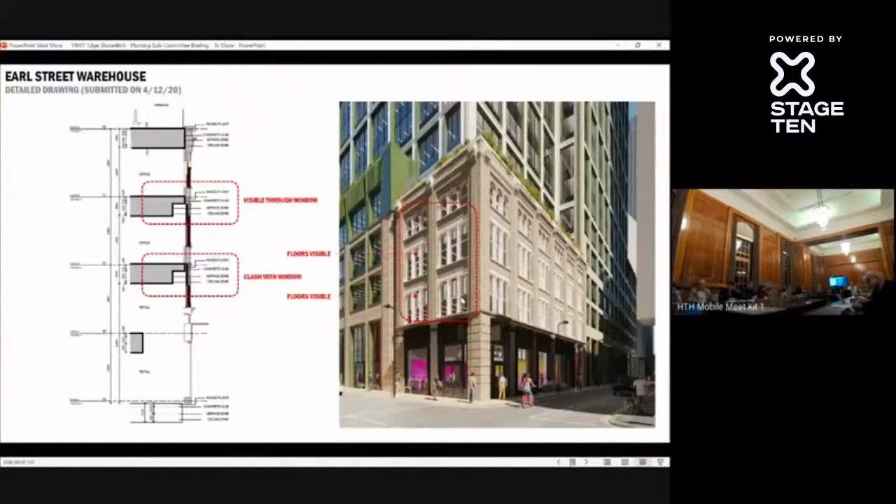I was just going to ask questions in relation to the 100% use of office space. I mean, you're probably aware that there is a draft area action plan for Shoreditch, where we'd prefer to have more mixed developments, a smaller percentage of residential. Given the opportunity to rethink the design, did you have any thoughts about residential at all? Did you consider it, or did you look at viability?

In truth, we didn't. We're aware of the policy, and obviously we're aware of the extant scheme, and we had early discussions with officers about the fact it's not quite 100% office—there's an element of retail in there—but the principle of an office-led scheme, and they agreed to that, noting the extant scheme before. So no, in short, we didn't test that. It's never been part of the approach. It's always been an office scheme.

Okay, next, can I ask—sorry, Councillor Webb, do you have a follow-up? Yeah, I was going to say, presumably that's in keeping with the area, it's primarily office space in the immediate vicinity. That's right, there is a residential scheme directly adjacent to it, One Crown Place, but yes, it's primarily an office location. But we do recognise the policy in the action plan that the previous scheme was office and the replacement is office. I'm just wondering—could you use the microphone, please?

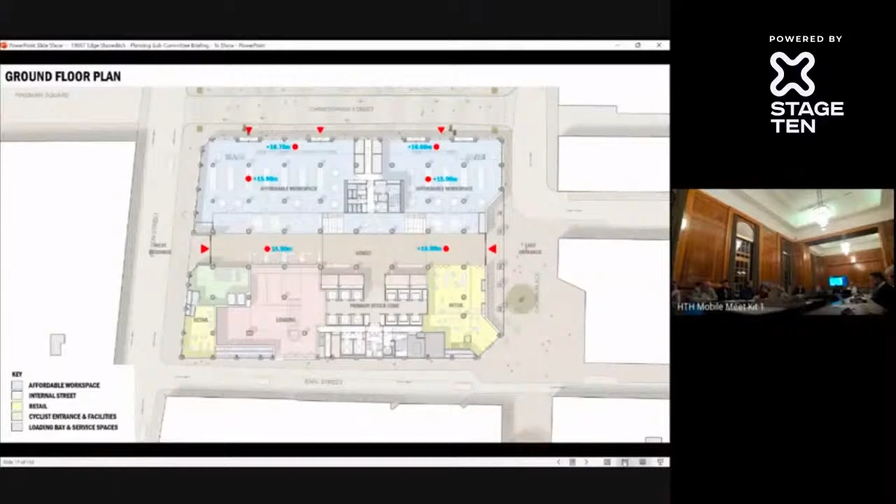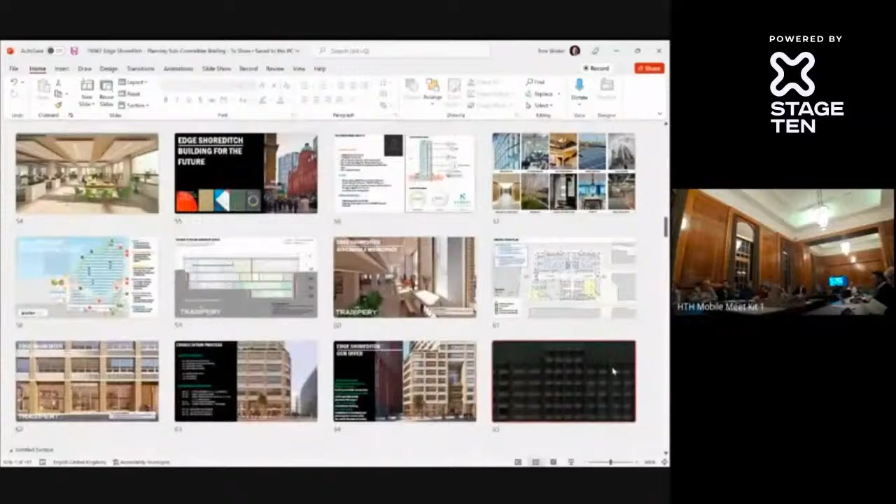I'll deal with that one first. Yes, in short, Section 106 requires that, and it's something Edge have actually got on one project in London already. They've just started on site recently, in the last month, and there's an apprenticeship scheme there. There's an apprenticeship scheme here as well, and that answers the question - yes, we're very committed.

Clearly the timelines are not completely set yet. We'll go first of all for planning, and when we achieve planning, the earliest we could start on site would be somewhere around 2024, when the site comes back to us - subject to planning and a number of other things. It will take about 3 years to construct the building as well.

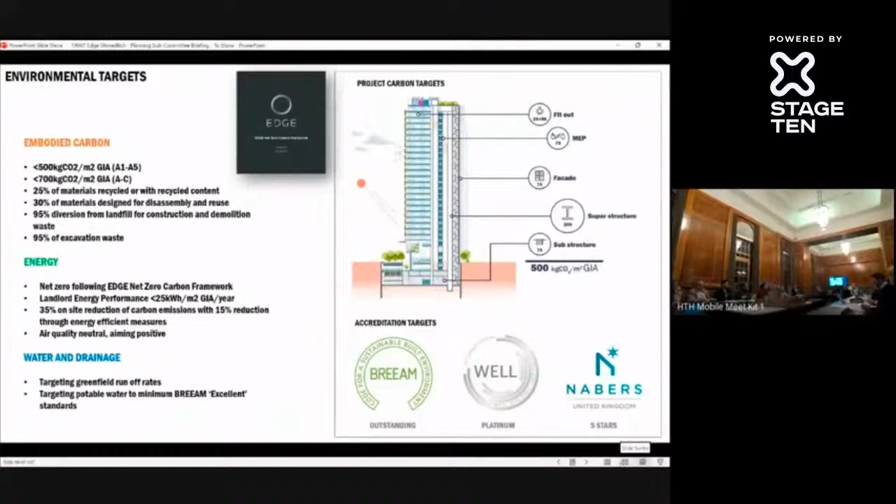Then we tend to use a very passive system for heating and cooling. In the Netherlands we use a lot of climate ceilings - it's radiation-based heating and cooling, which is more comfortable but also a lot more efficient. We're using a floor-by-floor plant rather than central plant, which means we can easily dial up and down the building. Also if there's a pandemic or something else, people occupying only certain floors gives more flexibility.

The whole system of air source heat pumps really heats in a very efficient way. With all these measures, the basis of heating and cooling really diminishes. The biggest one that's left over and hardest to put down is lighting. We did a lot of work with Philips in the Netherlands on how we can drive efficiency in the lighting, how we can use smart technology to make it more adjustable with daylight etc. So really squeeze the last bit of energy out.

So sorry if I bored you with a lot of detail, but that's the type of approach we take to a building like this to really make it as efficient as possible.

Just to follow up, with all of the other provisions in place, the air source heat pumps and the size and range you're going to use - have you seen these working effectively in a building of this size elsewhere? I know these things do seem to work better in the Netherlands than here.